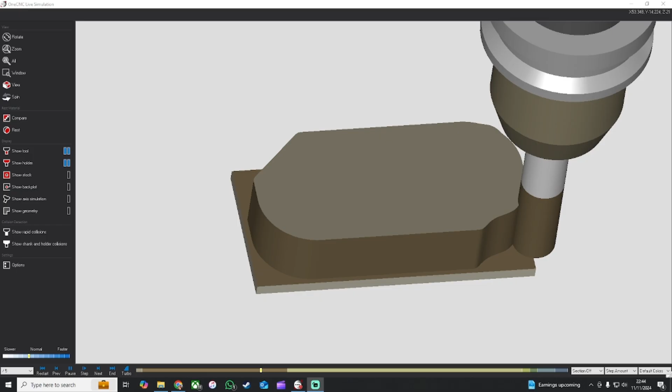I'm Luke and I'm going to be doing a beginner's guide, lessons 1 to 3. This is going to be a very basic entry level part, but this will include in lesson 1 how to design and draw and model your part, extruding curves and cuts, the do's and don'ts around them, modelling chamfers and fillets, and video 2 will be how you apply your toolpath, and this will cover pocket milling, facing, profiling, drilling,

chamfering and some surface machining, and video 3 will be strictly on how you post out your program and how you change your post to get it to look exactly how you want. For example, you might want to manipulate your post to get it to look like your company standards, or there's certain safety lines that you want to add in for clearance reasons. I'll show you how you do that.

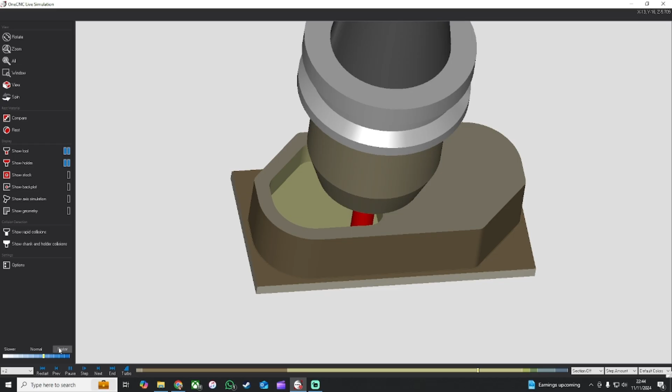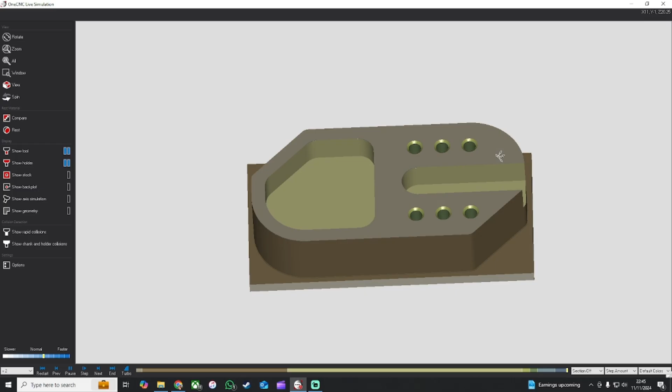So I'll just speed this up so you can have a rough idea on what we're going to be machining. I tried to add a little bit of, not everything, but a little bit, different style pockets. For instance, you've got a closed pocket and an open pocket there. Got countersinks and some through holes. In the one we do, we will be machining the back of it, and I will fillet this pocket around here so we can do a bit of surface machining and touch on that as well. So let's get on with it.

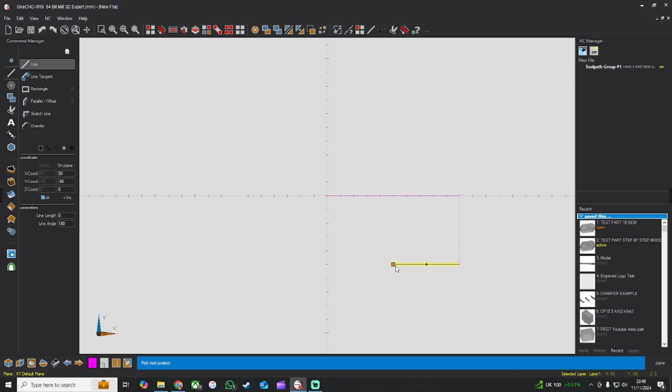Okay, to start with, let's go to File, New. Click on the screen with our left click, double click spacebar to home our view. Let's go to our line command. Now we're going to draw a line 100mm long. So start 100 in there. Enter. Let's go down 50mm. Click there. I'm just going to draw a line, making sure it's at 90 degrees to that one. Draw a line, same for there, 90 degrees to that one.

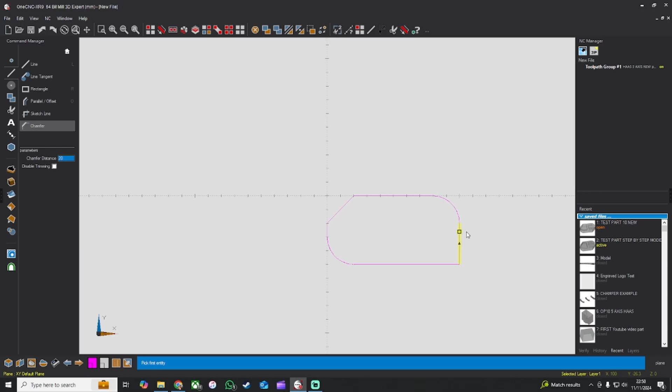And I'm going to get my fillet tool. And you can use your fillet tool to trim. 20mm rad, put that there, put that one there. Go to your line tool, chamfer, 20mm, there, there. Go back into my fillet tool, 3mm. 3mm there, 3mm there, one there, and one there.

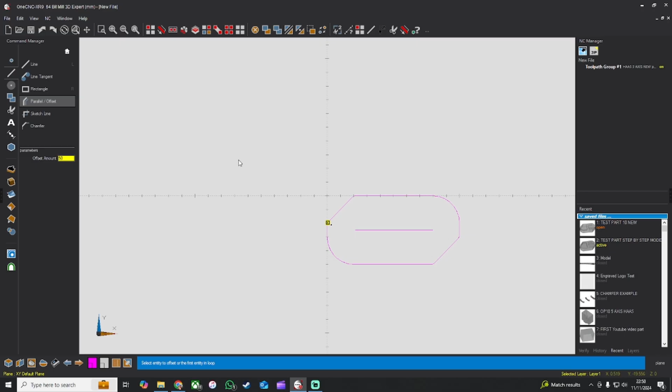Now what I'm going to do is I'm going to move all this to the centre and then carry on drawing from there. So I'm going to give myself a datum. So let's offset that. My part's 50mm wide, so let's offset a line 25mm from there. My part's 100mm long, so let's offset a line 50mm from there. See where them lines meet? I want that centre point. So let's grab my point. Let's click that in there like that.

Now, whenever you're trying to exit your line tool, for instance, like this, just right click wherever you are, and then it'll stop using it. You'll see me do stuff, and I'm probably not the world's best at telling you exactly what I'm doing, but I'm trying to improve as I go.

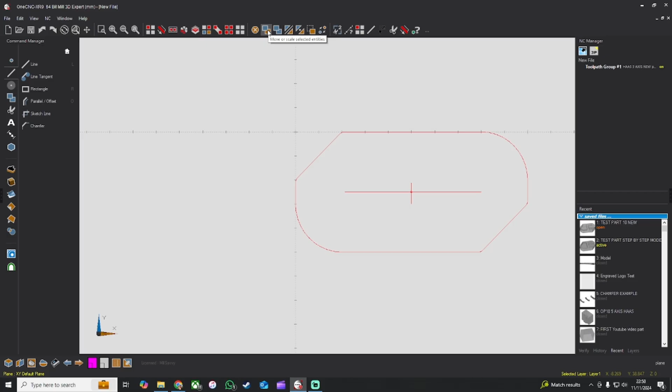So select everything. This is your move command up here. Grab that centre point. Don't rush into it. You can see there's multiple points to snap onto. Make sure you're grabbing that centre point. Zoom there like that. Click there. Zoom out using your scrolly button and drag that to the centre.

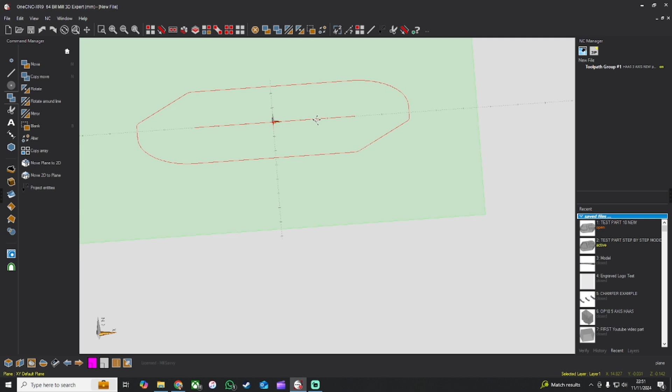Just like that. You can do a quick check if you want, just to see if that's 25, 25, 50, 50. You can see it's in the middle. If it's not, good time just to shift it now. So if you select everything, go on your move command. You can select anywhere you want. If you wanted to just move it over, you can go incrementally down here. If I just needed to move it 0.1, I could go minus 0.1, and that sorts it all out. But obviously I don't want to do that, so let's unselect that.

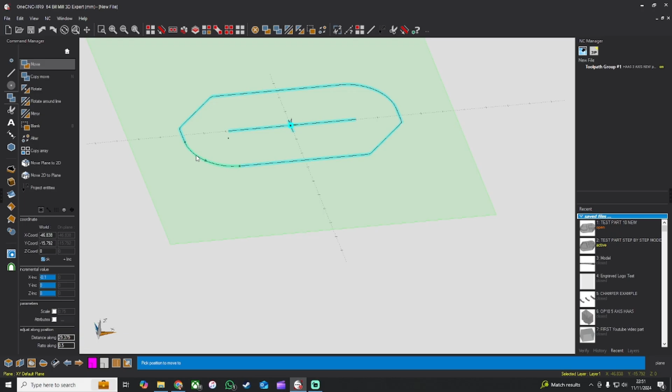So what we're going to do now, we're going to draw the pocket this side and the open pocket this side, the 3 holes here and the 3 holes here, and then we'll show you how to extrude your curves and apply some chamfers and some fillets. So let's just use our parallel line offset, and we're going to go 5mm from the centre. Not like that, we're not. Do that again. 5mm from the centre there and there.

I'm going to bring that line in, this one, and that one. And then I'm going to use my fillet command. And obviously this works like trim too. Grab there, grab there, grab there, grab there. And just trim it in with 6mm fillets everywhere.

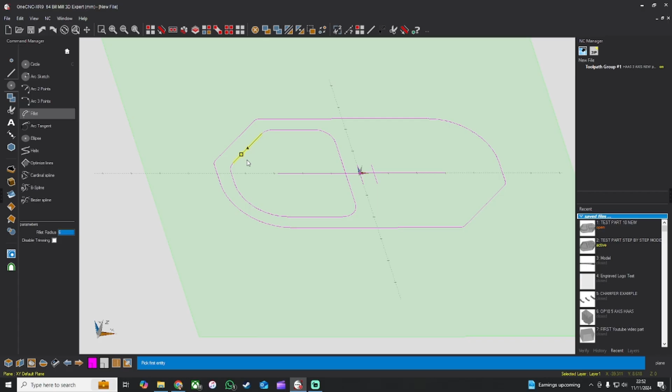I'm then going to go back into my line, go parallel again. I'm going to change that to 6, and I'll offset that, and offset that. I'm not worried about this sort of spilling out into this pocket. I'll trim that off in a second. I'm going to fillet again, 6, grab that line that I want, that line that I want, just like that, and you can see it's got rid of them lines.

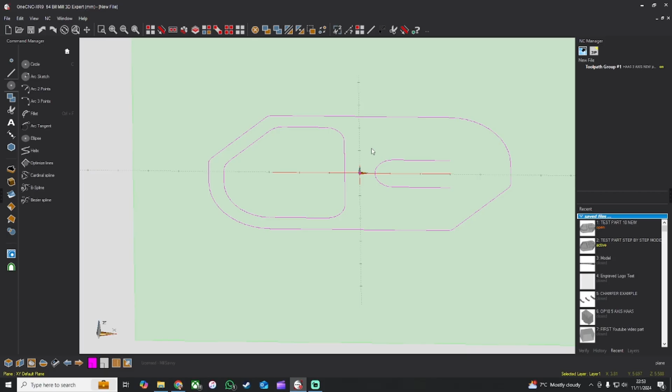What I'm going to do now is I'm going to get rid of these central lines that I no longer need. So left click twice to select both of them, then right click to confirm, then click delete. I'm now going to grab some lines and extend them outside, making sure they are straight. So double click with spacebar to make sure. You can see there that the line angle is 0. I'm just going to make sure I'm outside of the profile, and this will be made clear in a minute.

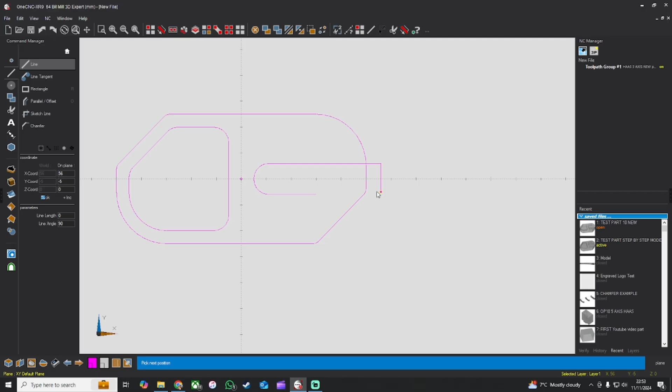I'm going to trim them in like that. What I'm going to do now is add my holes. I'm going to choose where to put them. I'm going to say 10mm there, 15mm. Click OK. Make that 20. Click OK. Make that 30.

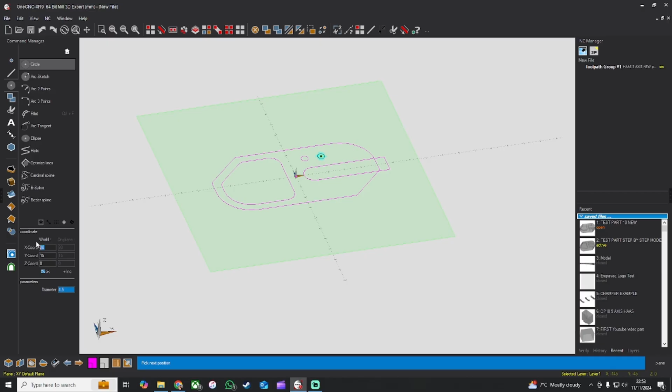I'm then going to grab them holes and mirror them down there. Select all of them. Go to your mirror. Grab the center where you want to flip it from. 180. Left click again. And that's put them holes down there. So that could save you a lot of time.

If you had loads of holes, I'm pretty sure if you go over here, you can do this tool here, this grid of holes, and that saves you tons of time. You can add thousands of holes and you've only got to do a few clicks.

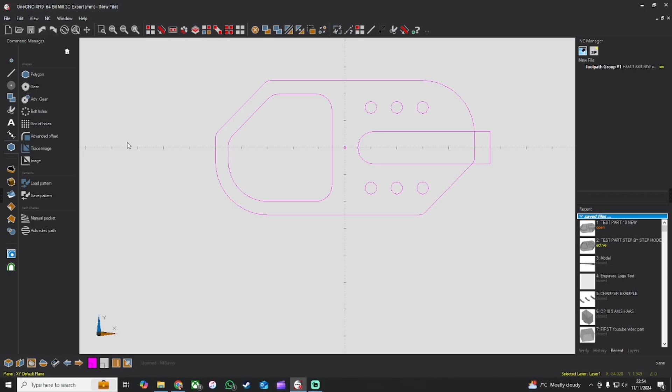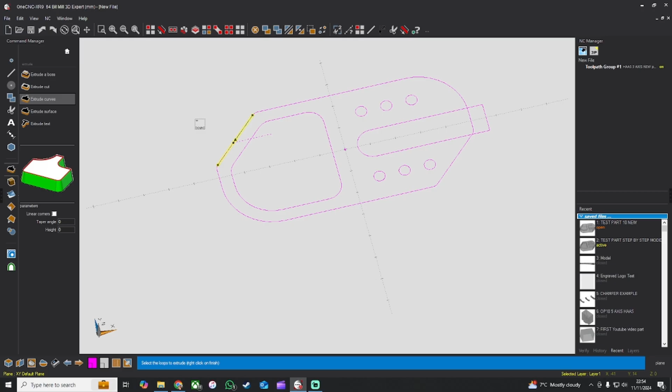So what we're going to do now is we're going to go into our extruding tools. So let's extrude some curves. And you only ever want to do this one time when you're creating one entity. For instance, this is the model we're working to. So we only want to extrude one load of curves, otherwise you're going to create multiple different entities, or in Fusion's case, bodies. So click there, left click, and then right click to confirm.

Go down to 20mm. Type in 20mm there. If you haven't got a steady hand, click enter. Just going to turn this on layers so you can see what we're doing, and I'm going to turn this on model.

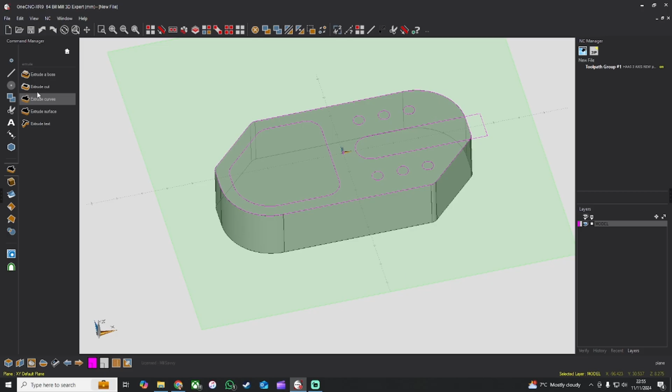Now we're going to extrude some cuts. I'm going to grab that, and I'm going to say -10. Now I'm just going to left click, and I'm going to grab that and left click again. So 2 left clicks to do that.

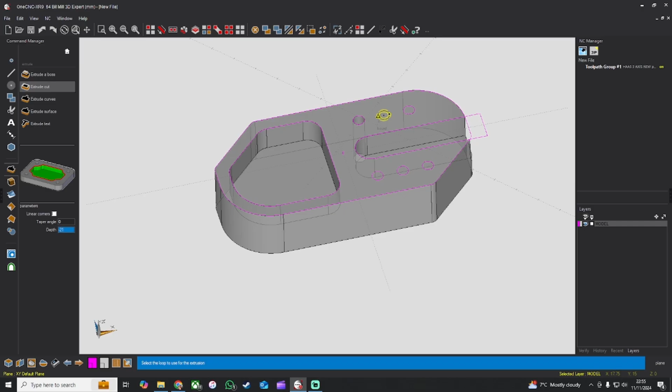And then I'm going to change the depth to -21 for the through holes. I could set that to -20, they'd still be through because it's exact on a model, but it's a habit to just go a little bit deeper just to make sure, but it would work.

Now I'm going to select everything and unselect the model just to get rid of all these lines so it's not so messy. If you're likely to use these lines later, this is a good time to move them onto another layer, and you are, because you've got your profile border, your pocket borders, your hole positions. So it would be a good time to actually just move them onto another layer.

You just want to put lines and holes, call it whatever you want, and we'll just move them onto a layer. So we'll save them for later. Let's select all of that. Let's go on our single entity and unselect our model.

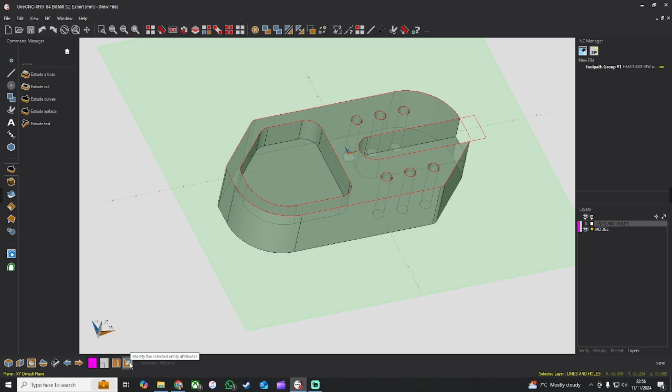Now what you can do, there's 2 ways to move it. You can either project them up to your plane, and at the same time it projects it, it moves it onto the current layer you have selected, or you can go to this command down here, modify, go onto your layers, and you want to select the layer that you want to move what you've got selected.

If it's defaulted to select it, click off it, click back on it, then click OK. It's a little bit of a bug. It won't move it if you don't do that. Now you can see I've moved it, so I'll turn that off.

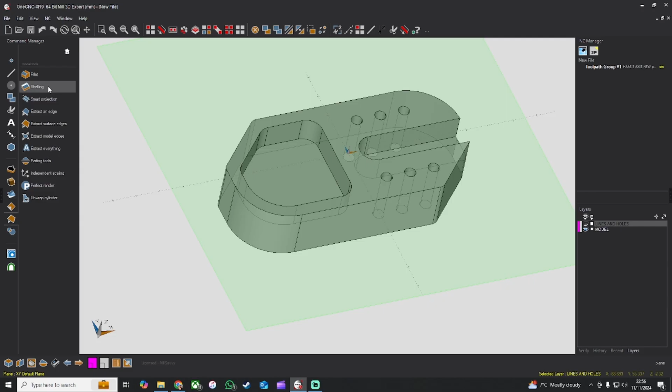Now what I'm going to do is I'm going to fillet this pocket and apply a chamfer all the way around. So we'll go down to our model tools, go to fillet, and this covers chamfering as well. We'll go standard fillet, 1mm. Click OK, grab that pocket, you can see it grabs everything, and then right click to confirm.

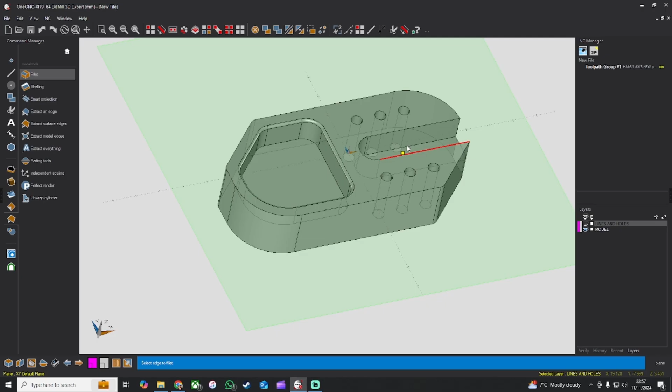Go back into our fillet tool, go chamfer. We'll just say 0.25 chamfer. You can make that 1mm if you want. Grab anywhere on your profile, it should link in. Let's grab that pocket, but we also want to grab the profile, so select that as well. Right click. There's your model.

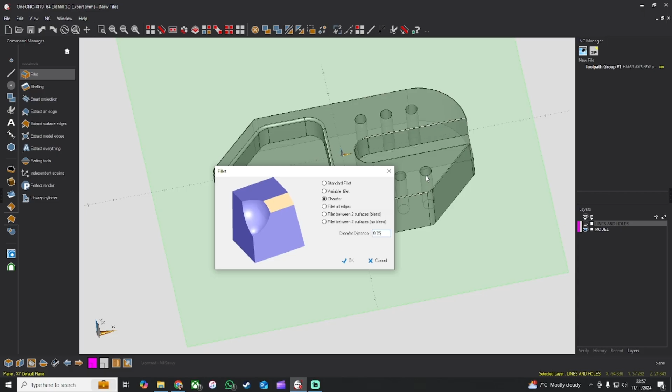I also want to countersink these holes, so let's do a chamfer again. And that'd be 0.75 because I want a 6mm countersink. That's a 4.5mm hole. So 0.75 that side, 0.75 that side, gives me 6mm. So let's grab them.

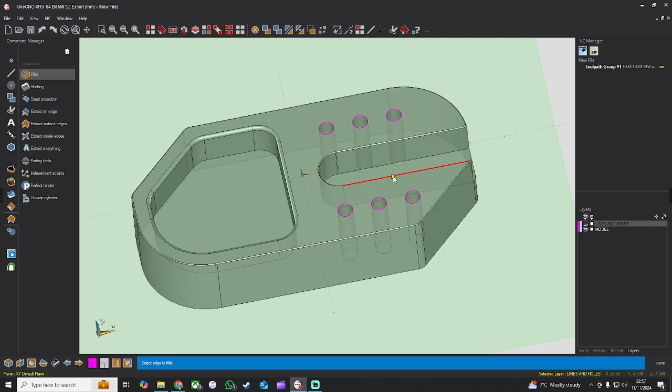If you accidentally select this line down here, for instance, by left clicking, like that, just left click it again and it'll get rid of it. Because sometimes you might be doing 20 holes and you get to the 19th one and you select the wrong line. Don't panic, just click it again, unselect it, then right click to enter. Okay, there's our model, nice, quick and easy.

It's a good time to click save. So save it as where you want to go. I'll click save. That's what I'm going to save over. And then in video 2, I'll show you how to machine this.